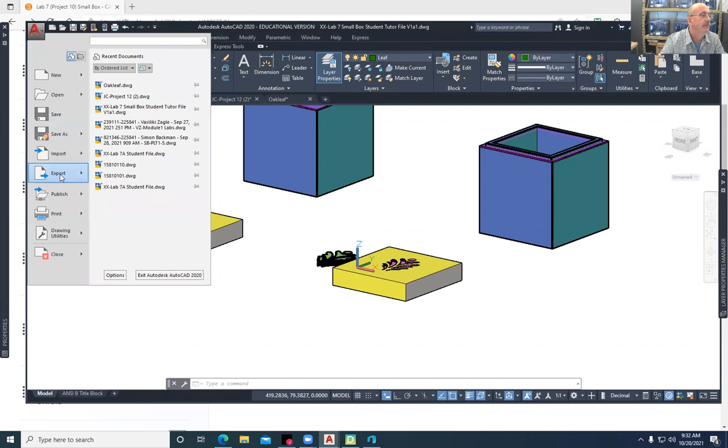Continuing, I'm going to export this model from CAD. I'll say export, and go with other file formats. I'm going to call it box top, put it on my desktop, and say save. Then I'll select that and hit enter.

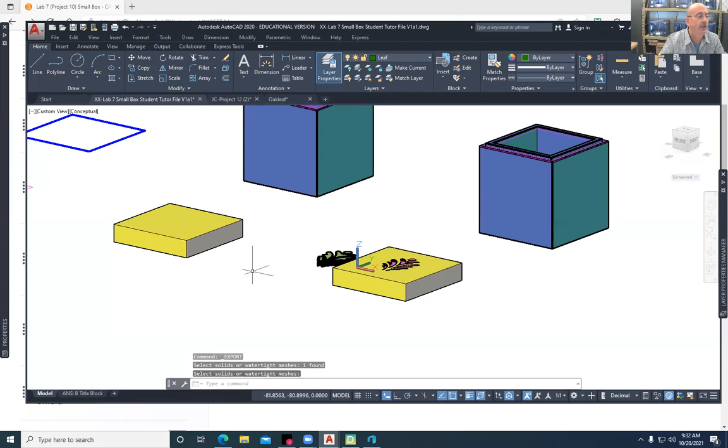Then I'm going to do this again for the logo. Shift middle mouse wheel, export. I'm going to say leaf, and hit save. Then I'm going to select the leaf, all of it.

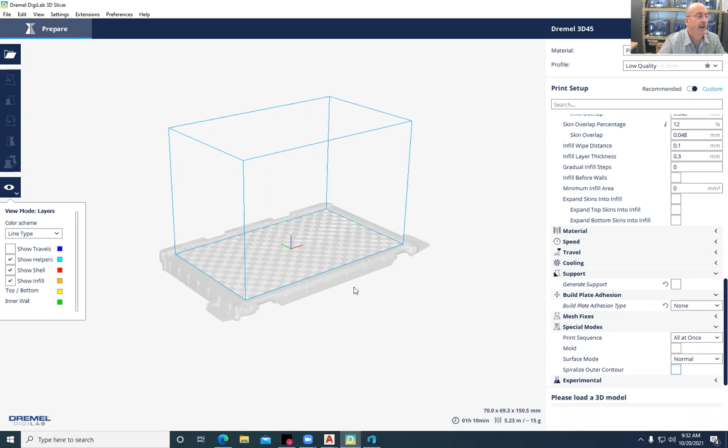Then I'm going to go into my builder, my slicer. I'm going to take out this model here, and uncheck what I had on there before, which was spiralize outer contour. I'm going to open up the box file top, box top. It's going to come in really small because it's... oh, never mind, came in the right size.

So here's my box top. And if I prepare it, I can see how that's going to be set up. What I recommend you do is flip it over so that the build side on the glass is nice and smooth. As we build it, we could probably get away without support material on it.

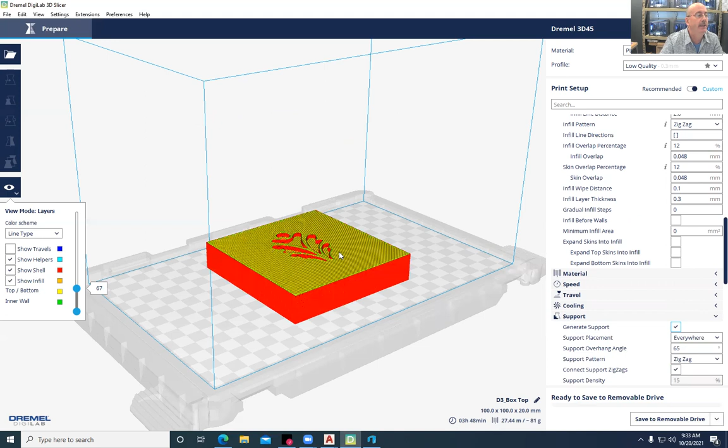Or we could generate the support material and then just pick it out with a tweezer or something that would allow me to pull that out. So I'm going to put the build plate, generate support material on there, and prepare it again. Then I'm going to flip it over. Now there's no support on it because it doesn't need it, because it's oriented that way.

And I'll flip it over now, and then re-prepare it. We can see the build time will be 2 hours and 43 minutes. It's a rather large box shape, and I'm going to leave it. I may scale yours down because they are kind of big.

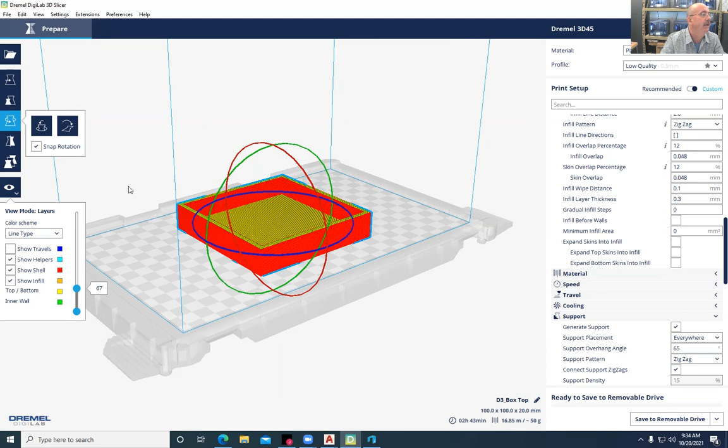If I look at the layers, what we'll see is there is some support material that it is putting in the leaf area, which is fine. Now I'm going to import the leaf geometry. Before I do, I'm just going to make sure I have enough room on my pallet. Then I'm going to open my leaf geometry.

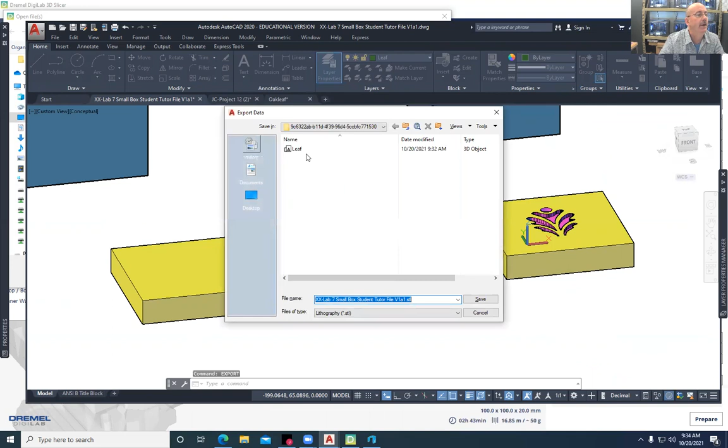For some reason I don't see it. Maybe I goofed it up and put it somewhere else, but let's take a look and see what happened. So, export. Maybe I put it in downloads. Yeah, I just put it in a temporary file. So I'll say desktop, and I'll say leaf.

Those of you who are watching probably saw it live. So there we go. Then we're going to take a look at how that comes in. So if I come back here to my PC and go back to my desktop, there's my leaf. I'll open that, and then select it.

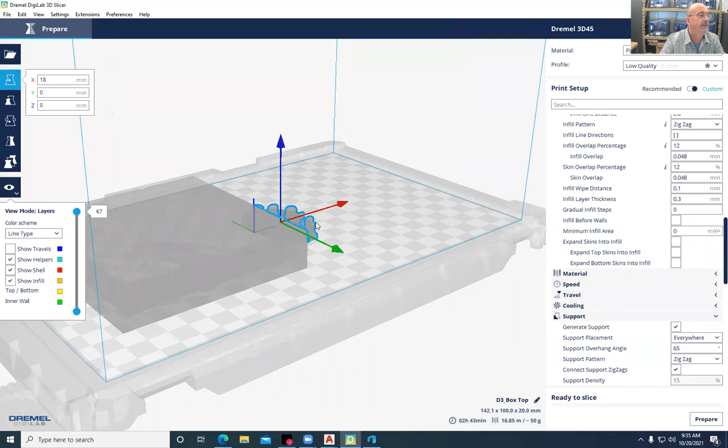I'm in the move command. I'm going to move it over. Then what I'm going to do is use the horizontal expansion on just that part. I believe that if I have it selected, it will work. So I'm going to go find my horizontal expansion setting.

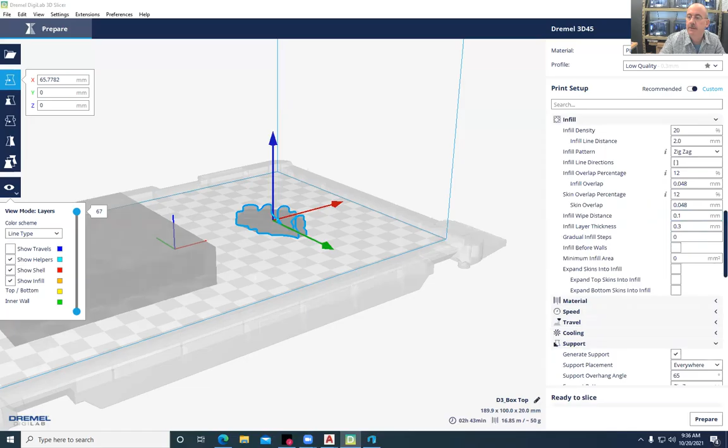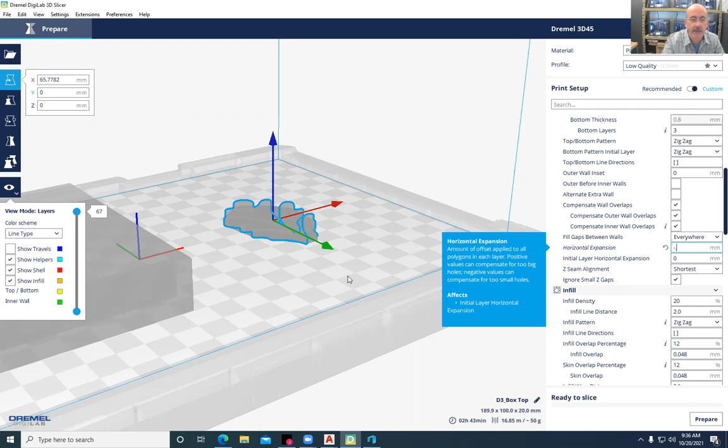I'm going to pause while I locate that. Resuming. So here's my horizontal expansion, and horizontal expansion will offset our model and allow us to make it a little bit smaller so that we can press it into the part. So we're going to enable that by changing the value from 0 to minus 0.2 millimeters, and then prepare the object.

Then we're going to print it. I've got some of the printer set up, I'll run a print of it. It's a fairly long print, and this is probably not going to be able to be seen in this video, but I'll make another recording next week to show the results of that.

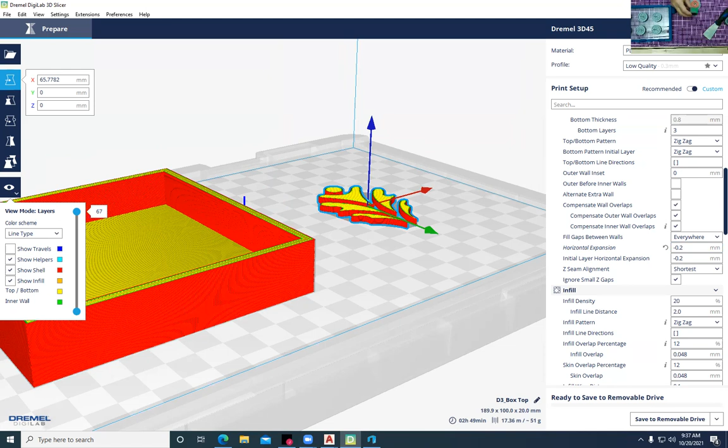In the meantime, I have a project that we worked on last week that we'll take a look at. So this is how we're going to work this project. We'll be able to print these in different colors, so we can set this up. If you do have a color preference, indicate that in the drop box when you turn in your project. Let's take a look at how these projects looked in real life, then we'll look at how the Cubs logos turned out, and I'll stop this recording.

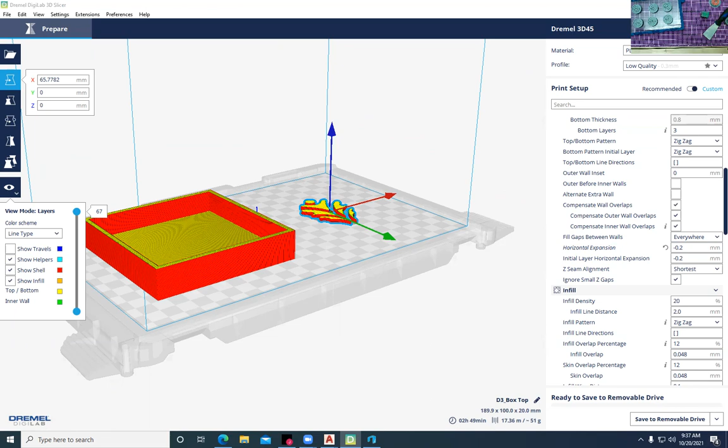And let me grab one. I thought I had one here. So with the horizontal expansion, what you want to do when you take them off of the build plate is, I found putting a piece of tape on it before I removed it would keep all the letters from flying apart. And then it's okay.

I can just take these parts out, and then as I press them in, remember we printed them upside down so that it's nice and smooth, not ridges. Your tools, have some small files. You can get these online or at Harbor Freight if you need to do any work with it.

What I found was that the B's have these little inserts that stick out, which have to be taken out, and you don't see them anyway. So as I put in the other letters, this super sticky tape here, I can press them in.

Like that, I can remove these little tabs. The letter B, they're really not necessary. And put in my other letters. Hard to tell if that one's upside down. And that's how that works. You can take that off the build plate.